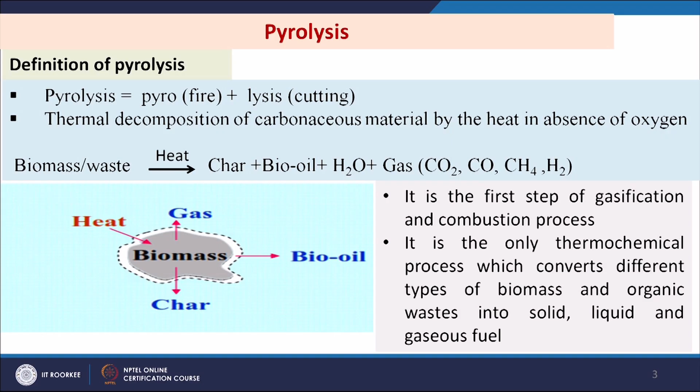Pyrolysis, the word itself gives some idea about it. Pyro means fire, lysis means cutting. So this is a thermal decomposition process, which decomposes carbonaceous material by the application of heat in absence of oxygen. So if we have some biomass and waste

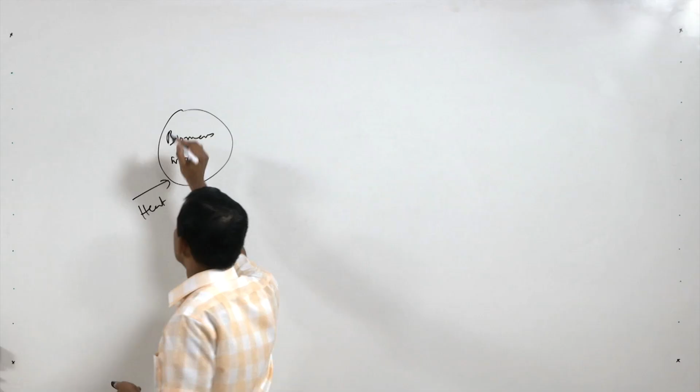or any carbonaceous feedstock, we simply apply heat. In combustion and gasification we had to put some other medium, that is oxygen for combustion, and O2 and H2O in case of gasification, but in pyrolysis we do not need these two, only heat, and that heat will give us char, gas, and bio-oil.

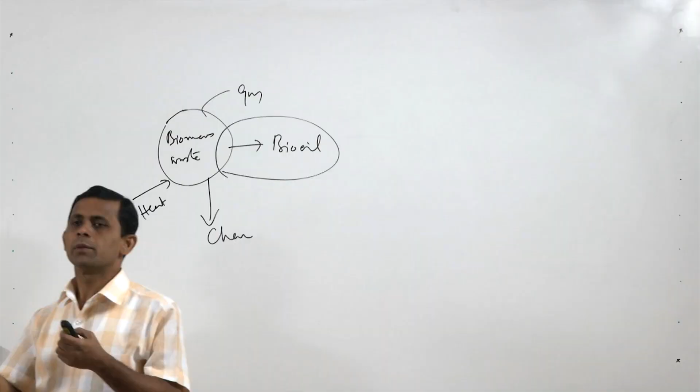This is very simple to explain this phenomena graphically, but in fact bio-oil production and char and gas production is not a very simple process. A number of simultaneous reactions are going on when we apply heat onto the biomass and waste.

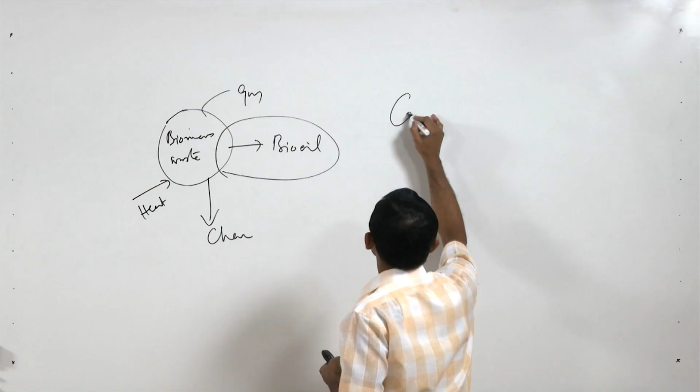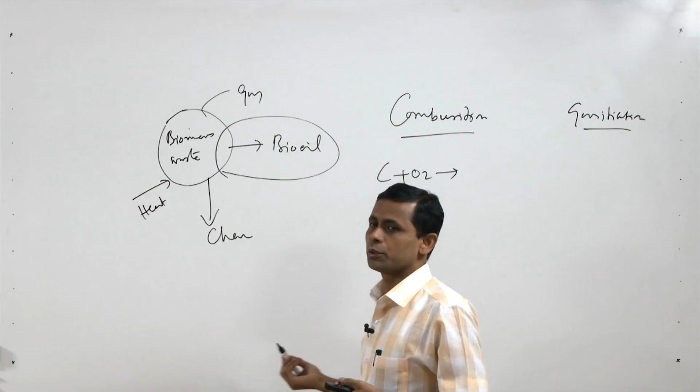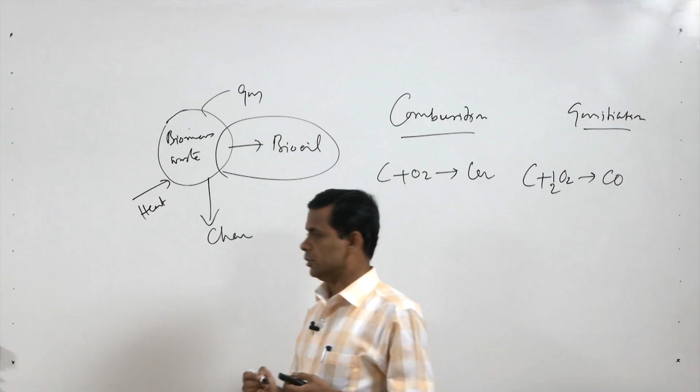If we think about a combustion process or a gasification process, it is very easy to explain these things: elemental carbon of the material reacts with oxygen and converts to CO2. Here we can say C reacts with oxygen and produces CO, but here there is no media for conversion, only heat.

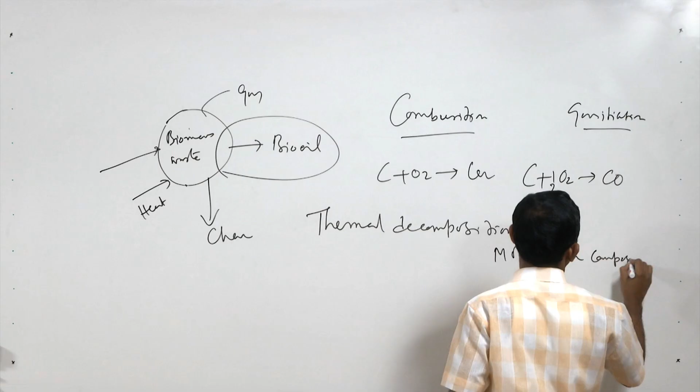So thermal decomposition is going on. The kinetics of thermal decomposition, what is the rate, how this is happening, what will be the molecular composition - that is not easy to predict.

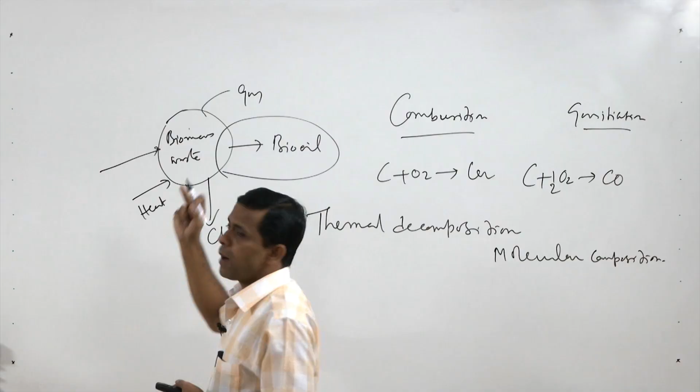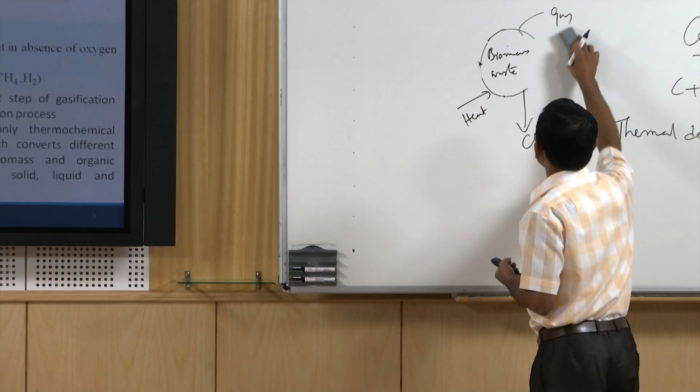This pyrolysis is also part of incineration and gasification. So this is the first step of incineration and gasification. When some waste comes in contact with heat, at first the moisture vaporizes and then devolatilization takes place.

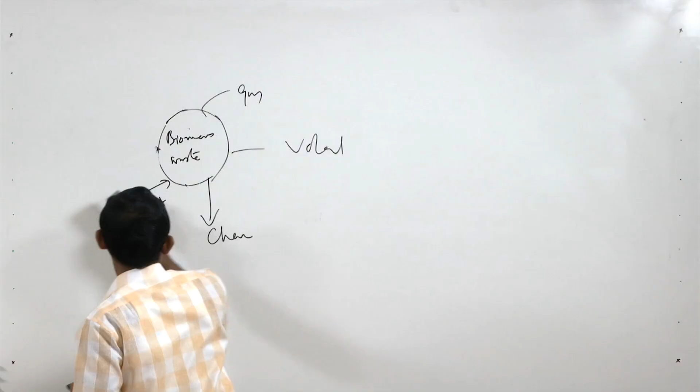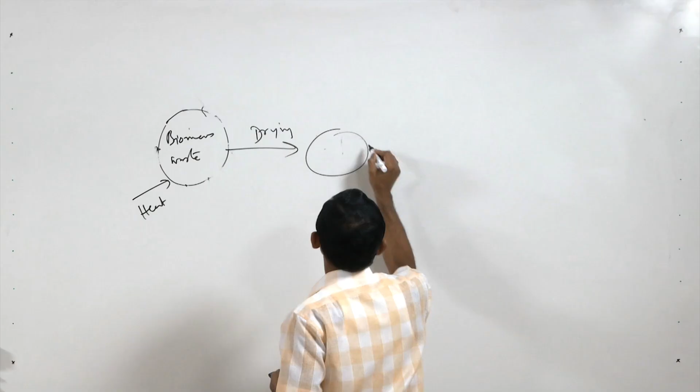In case of combustion, the volatile - first drying, then it comes to devolatilization, that will give us volatiles and char. These volatiles will contain many compounds: aldehyde, alcohol, acid, many things.

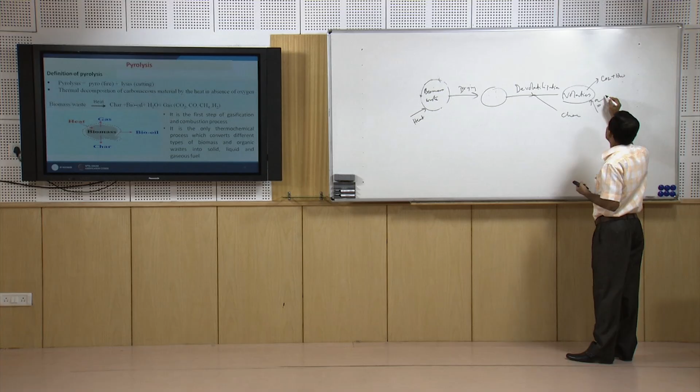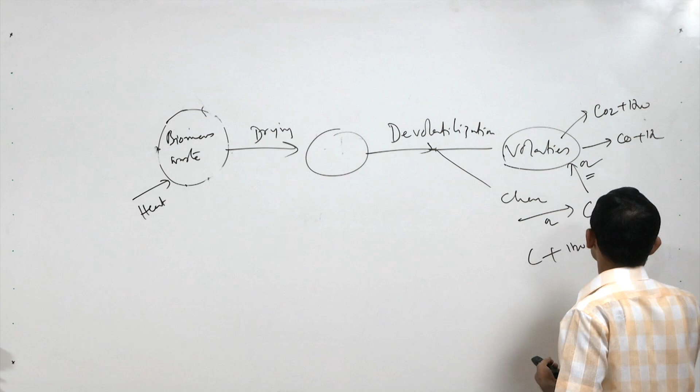So when we put oxygen, we get CO2 plus H2O. When we give controlled amount of oxygen, that will give CO, H2, and then char is also oxidized to CO2 in case of oxygen; again this char is converted to CO plus H2 in gasification. These are for gasification, this is for combustion, but in case of pyrolysis nothing happens here.

So these volatiles will go off from the system, or if we keep it for a longer retention time, those volatiles will be further broken down into smaller compounds, and those smaller compounds will also combine together through different chemical reactions and produce a number of products or components.

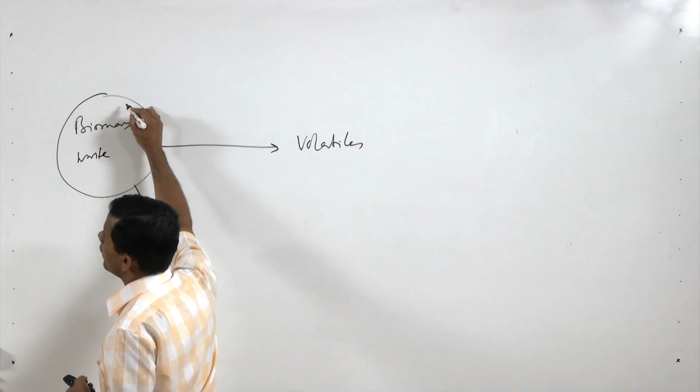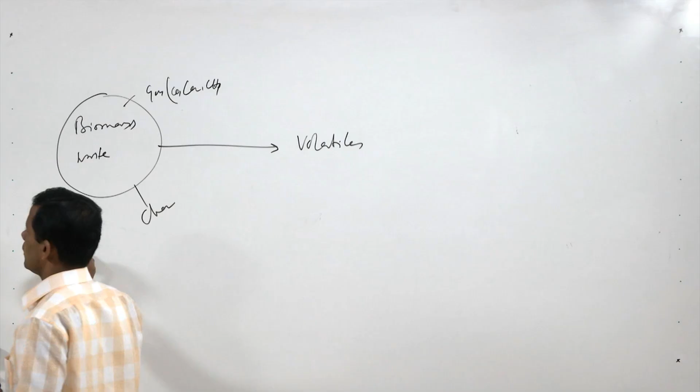Here the pyrolysis mechanism is shown in the slide, where the biomass and waste is taken and heated, then it gives volatiles, char and also gas. This gas may be CO, CO2 or CH4. The temperature here is 450 to 500 degree centigrade, for a very small time, say 1 second, less than 1 second.

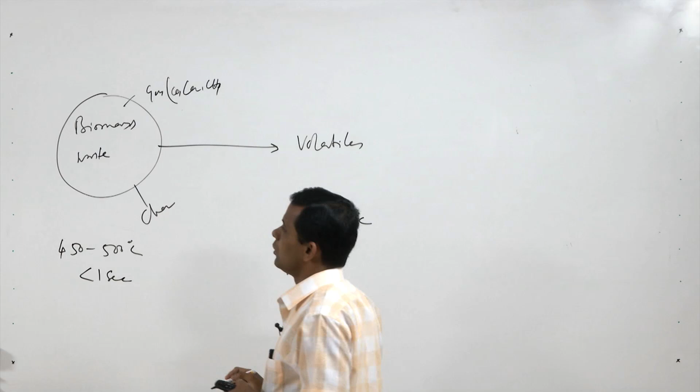If the material is heated, then we will get these things. Now we will increase the time, say greater than 1 second, at 400 to 500 degree centigrade. So these volatiles will further be broken down, giving some gas molecules like CO, CO2, CH4, or some other molecules with lower molecular weight.

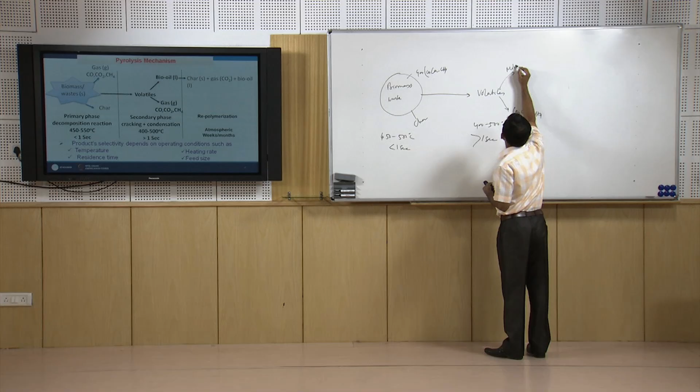So this volatile in vapor phase material is further condensed.

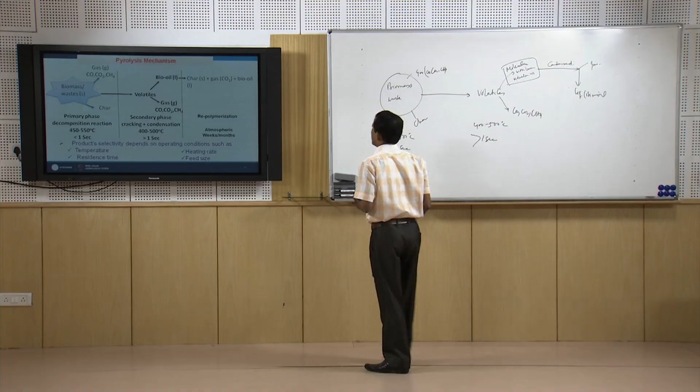After condensation, we get liquid, that is called bio oil, and the other part we get as gas. So, this is the mechanistic path for the production of gas, liquid and char.

Now, a number of reactions are going on, and depending upon the residence time, temperature, and pressure in the reactor, the distribution of these products will vary.

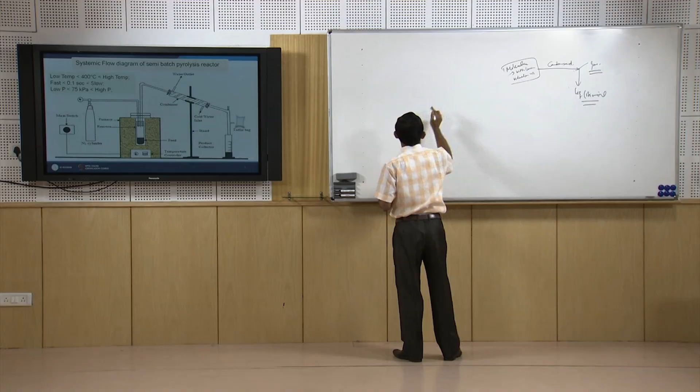So, this is one batch scale reactor for the pyrolysis of biomass and waste. We will get some important information from this figure. We have a pyrolysis chamber, a very small one, inside a furnace.

This furnace will apply heat. We put some material here, and we heat it using a coil. The material is connected, and when we raise the temperature, vapor will be released while char remains inside. The vapor and gas will go and condense in the condenser, giving us liquid bio oil, and gas from the top.

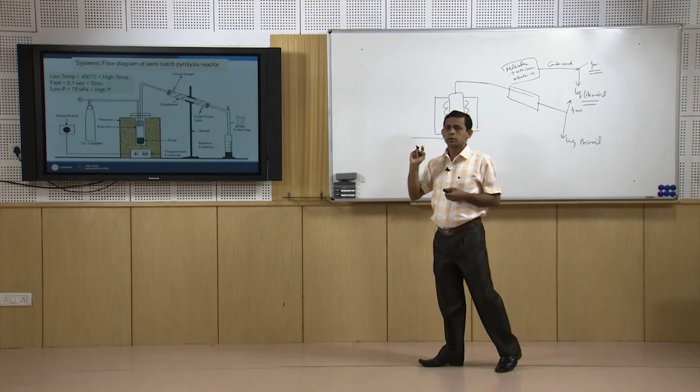One interesting thing is how the gases flow. We need to provide a carrier gas, which is basically inert nitrogen. This carrier gas supply is not necessary in the other two thermal processes, that is incineration, combustion, and gasification.

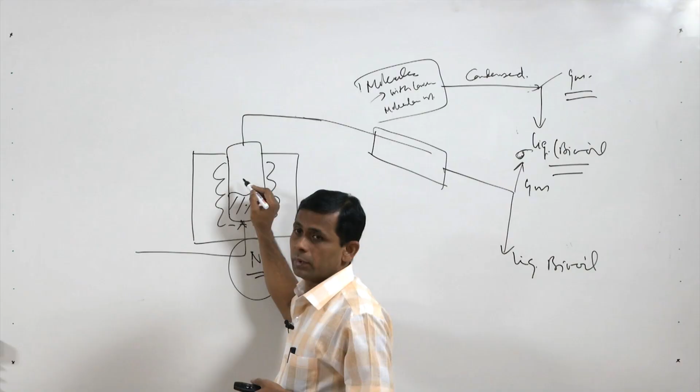So this is a characteristic of the pyrolysis process, where we need to provide nitrogen, or we may put a blower here and create a very small vacuum, so that the generated gas may pass through and liquid can be produced.

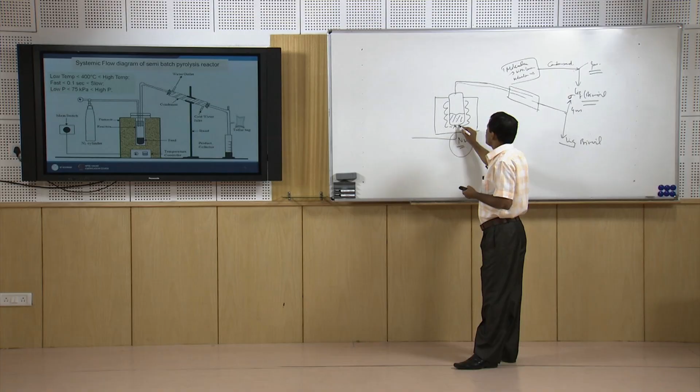Now, the few questions are: what will be the rate of heating, what will be the temperature, what will be the pressure to maintain certain products, because the product distribution depends upon temperature, heating rate, and pressure.

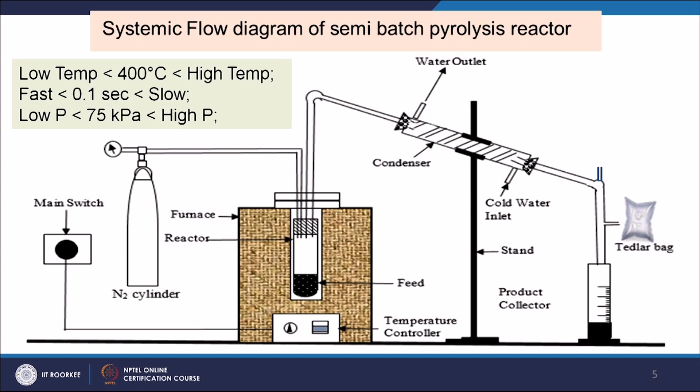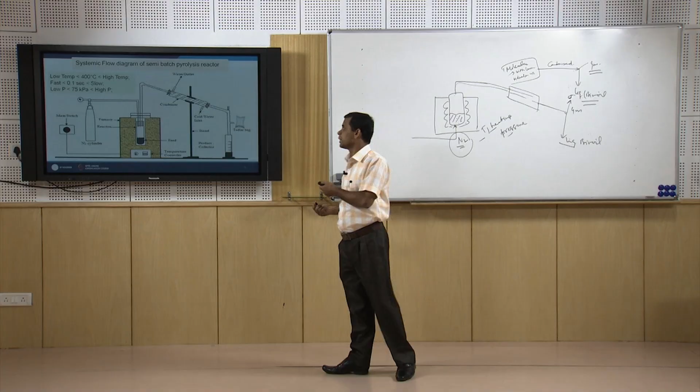Based on variations in temperature, heating rate and pressure, a number of pyrolysis methods have been developed and identified. In some cases we use high pressure, in some cases low pressure, but this doesn't mean a very high or low value. Low pressure means less than 75 kilopascal, and greater than this is high pressure. So pyrolysis reacts under atmospheric pressure, or below atmospheric pressure for vacuum pyrolysis.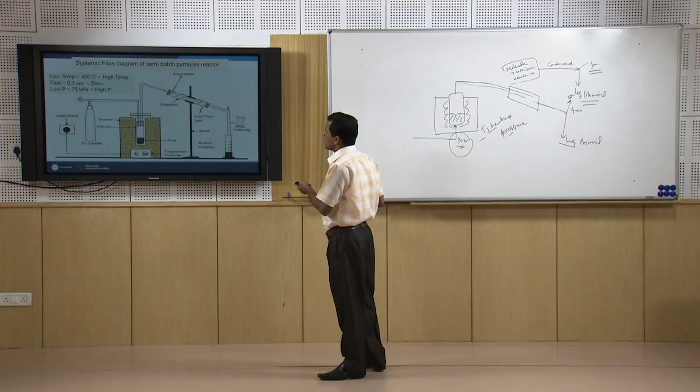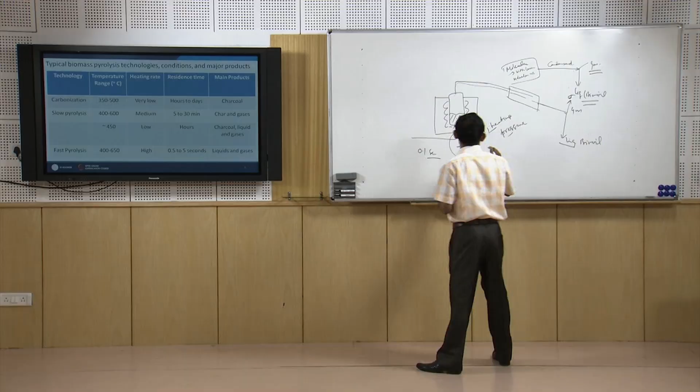Low temperature means less than 400 degree centigrade. Fast means residence time less than 0.1 second, and slow means greater than that. So these are some characteristics, or important parameters maintained in a pyrolysis reactor.

Now, depending on the value of temperature, heating rate and residence time, we can get different types of pyrolysis, like carbonization, the primitive one. In this case, a very slow heating rate is applied for a longer period, and 350 to 500 degree centigrade is maintained. By this method we get charcoal basically.

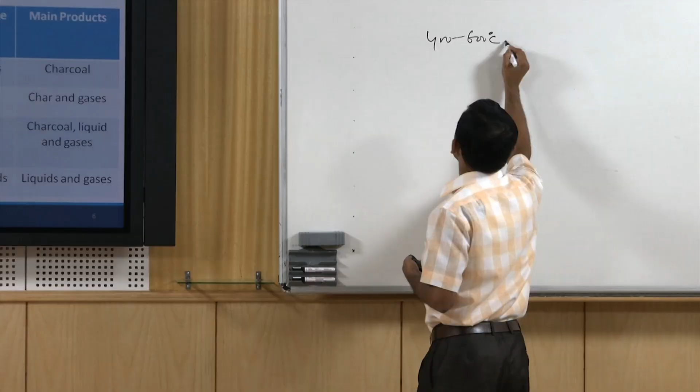Then slow pyrolysis came. For slow pyrolysis, the heating rate may be medium or low, and temperature is 400 to 600 degree centigrade. With a medium heating rate and 5 to 30 minutes of residence time, this gives us char and gases.

But if it is say 450 degree centigrade, with low heating rate and residence time in hours, then it will give us charcoal, liquid and gases.

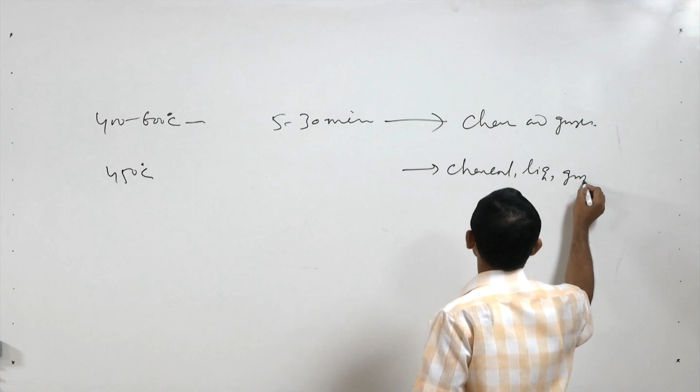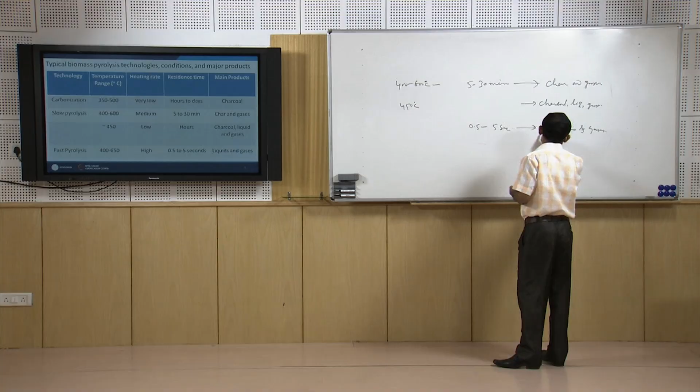Now, fast pyrolysis uses a temperature of 400 to 650 degree centigrade and a high heating rate, with residence time also less, only 0.5 to 5 seconds, and it gives us liquids and gases. The uniqueness of this process compared to incineration and gasification is that it can give three products: gas, liquid fuel and char, with liquid being the more desirable product. So fast pyrolysis produces liquids as a major product and is getting more interest in recent years.

Further development in this pyrolysis process is flash pyrolysis. In this case, temperature is say 400 to 650 degree centigrade, high heating rate, 0.1 to 2 second residence time, and it gives liquid and gases.

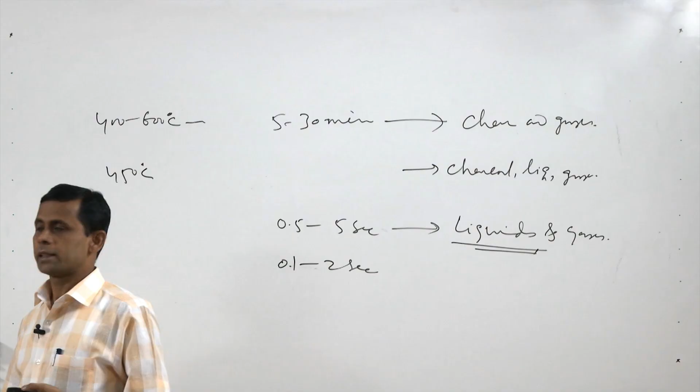Similarly, ultra pyrolysis uses very high temperature, around 1000 degree centigrade, and very high heating rate with very less residence time, less than 0.5 second. It gives us chemicals and gases.

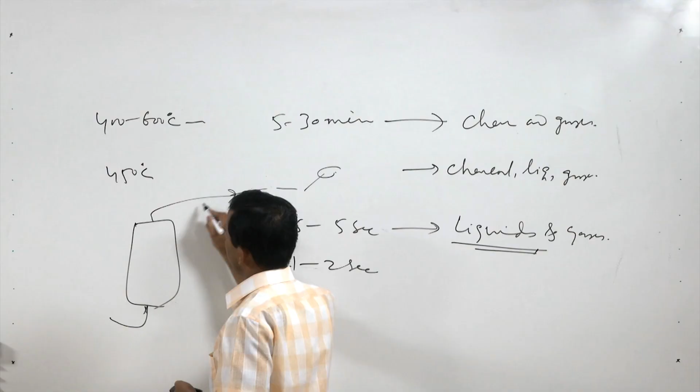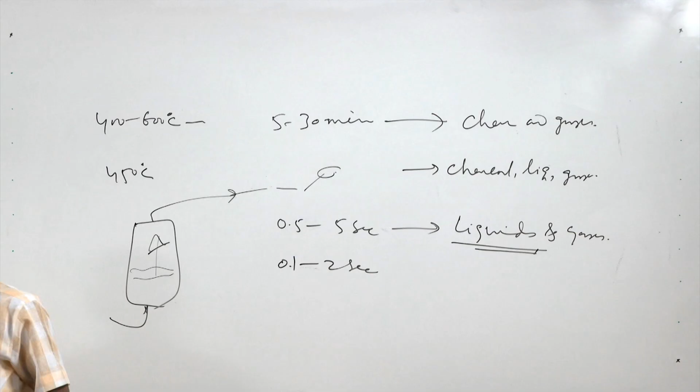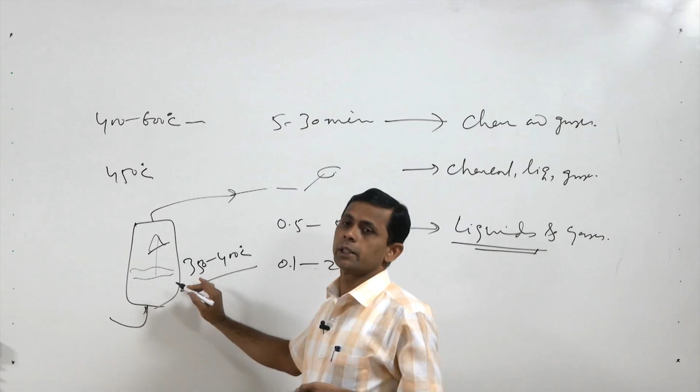Vacuum pyrolysis, as we were discussing, is when there is no nitrogen but instead a blower is added at one end to generate some vacuum. When vacuum is generated, more volatiles come into the vapor phase, giving us more liquids. That's why we get more liquid using vacuum pyrolysis. Here, 350 to 400 degree centigrade is required, which is relatively less than other pyrolysis methods, and we get 2 to 30 seconds of residence time with a medium heating rate required.

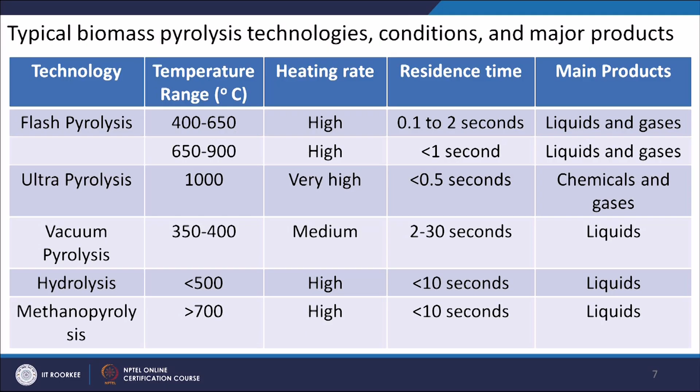Hydrolysis and methanopyrolysis are two other processes recently reported, and their conditions are provided here. For all these pyrolysis processes, the product distribution varies with increase in temperature. If we increase the temperature, the product distribution varies.

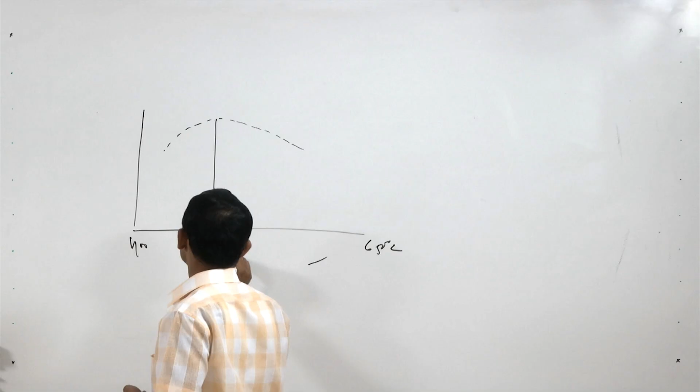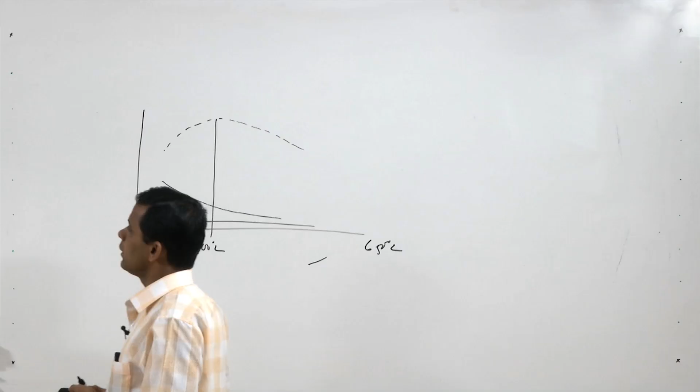If we go from lower to higher temperature, say 400 to 650 degree centigrade, the bio oil initially increases and then decreases after attaining a certain value. So around 450 to 500 degree centigrade, this decreases—this is specific to certain biomass. Biochar decreases with increase in temperature, moisture content shows no much change, and gas content increases with increase in temperature.

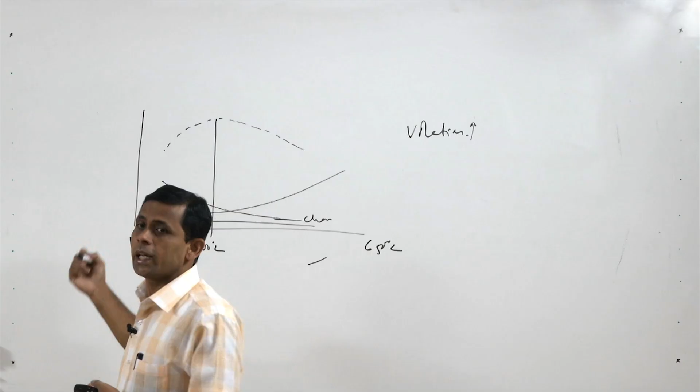We can explain this phenomenon on the basis of the mechanism of pyrolysis. We have seen that there is primary degradation, then further secondary cracking of the volatiles. So more temperature gives more gases, liquid decreases, and char decreases with increase in temperature because secondary reactions are going on the volatiles, producing more smaller molecules of gases.

Now we will see the process flow sheet of the pyrolyzer unit. In one pyrolyzer, we put biomass and waste. That biomass and waste must be pre-treated, because the unit will be able to handle only certain biomass, so pre-treatment is required, just like segregation and homogenization etc. That pre-treated biomass is used, and we need a carrying gas—nitrogen, an inert gas, is normally used. This may be a fixed bed type or a fluidized bed type.

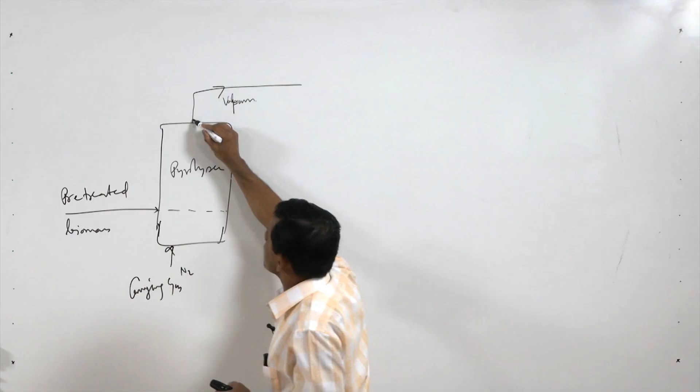If it is fluidized bed type, then we have to add sand. The sand will be fluidized and biomass will also be fluidized with the sand, and heat transfer takes place and pyrolysis occurs. When these vapors go up along with particles, some particles will also go, and then it enters into a separation unit. This separation unit will give us char, and part of the char can be recycled.

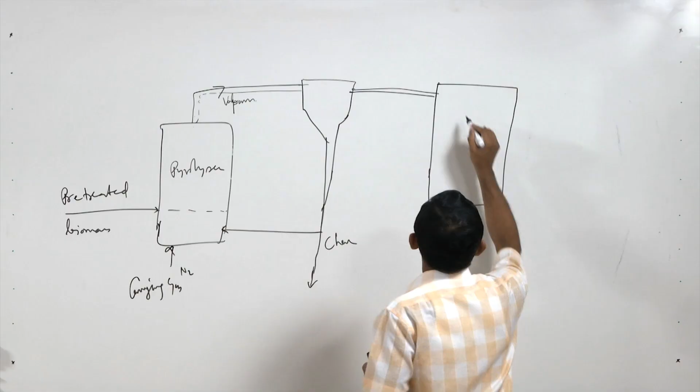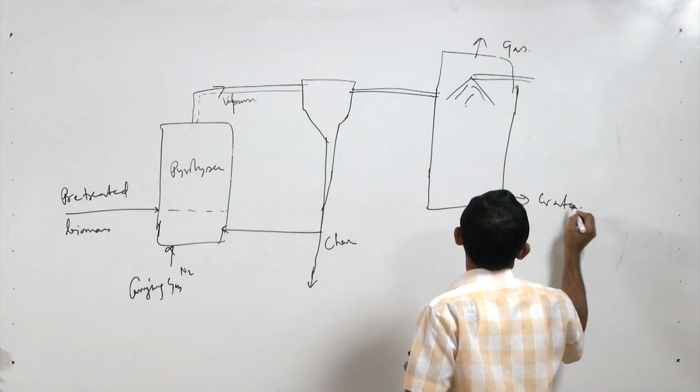Then this gas goes from the collector unit to the cooling unit, where it is cooled either by direct quenching or indirect cooling. Here an example is given as direct quenching, where we spray to cool the gas, which is then collected. From the bottom we get water having some impurities, requiring treatment, and we also get bio oil from the bottom.

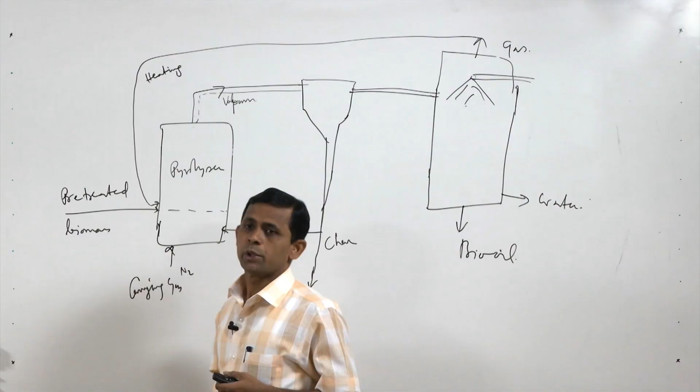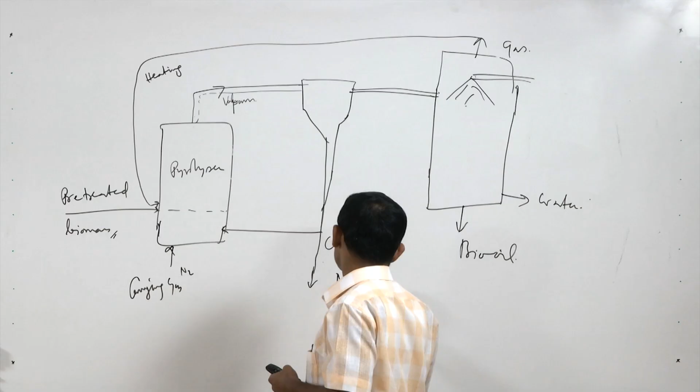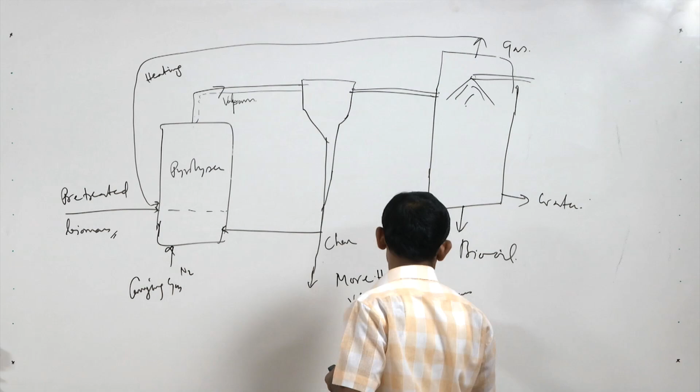The gas which we are getting can be sent for heating purposes. Now, the char we are getting and the biomass and waste we started with will have different heating values. The char will have more heating value than the biomass, waste, or any other feedstock. So this is the flow sheet of the pyrolysis process.

To understand the kinetics of the complex pyrolysis process, people use the help of TG, DTG and DTA data. On thermal gravimetric analysis, the data are generated like this. In this TGA graph, it is evident that up to 200 degrees only around 8% mass loss occurs, but when temperature increases to 334, 38% mass remains, meaning 62% mass is lost. After 500 degree centigrade, only 4.715% mass remains, and above 500, no significant loss of mass is achieved.

So by DTA and TG data, it is clear that for this particular biomass, sugarcane bagasse, we do not need to heat above 500 degree centigrade. Similarly, from this graph we see the rate of change of mass with respect to time: maximum 0.65 mg per minute at 311 degree centigrade, and 0.17 mg per minute at 446 degree centigrade. So the range 276 to 446 degree centigrade is more critical or suitable for the pyrolysis of this biomass.

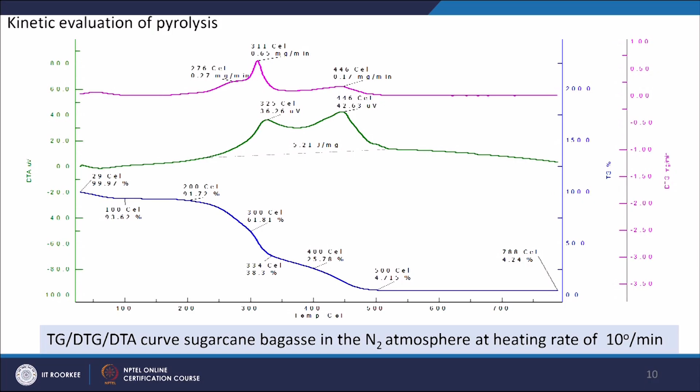These data are also used to determine the kinetics of the reaction and the order of the reaction. I am not going to explain in detail all those procedures, but extensive research is going on to determine the kinetic parameters for different types of biomass and wastes.

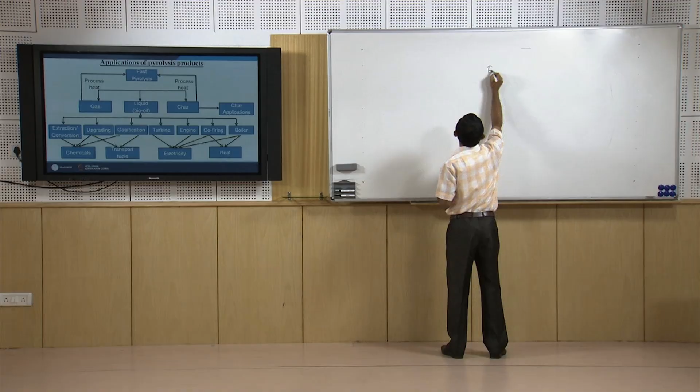Now we will see the application of pyrolysis products. Pyrolysis basically gives us three products: one is gas, bio oil, and char.

This gas will be used for the heating, because this requires heat, and that heat can be produced from the gas. Some char can also be used and burned outside this pyrolysis reactor for heating.

There are some other applications of char, and bio-oil can be used through different routes. It can be used for separation of the compounds present in it.

It has a large number of organic compounds including acids, aldehydes, phenols, ketones, etc. So those valuable chemicals can be extracted, giving us valuable chemicals.

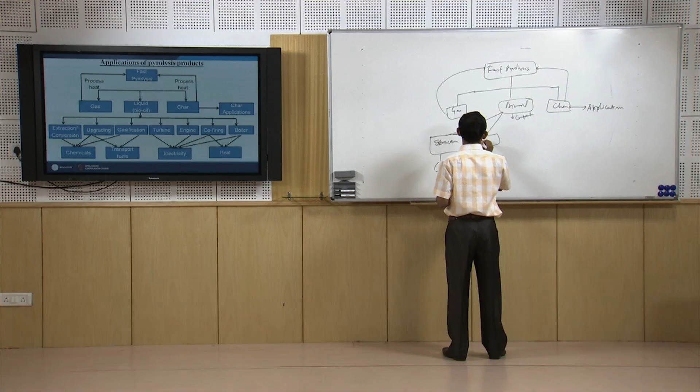This bio-oil can be upgraded, since its quality is not very good. Directly, bio-oil may not be used in engines, so we need to upgrade it. By upgradation, we can get fuels and chemicals.

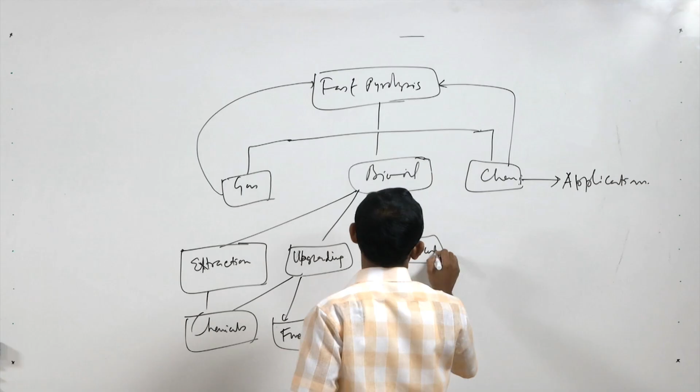We can also use this bio-oil for gasification. We can use this for turbines, for engines, and for boilers and co-firing.

Boiler and co-firing will give us heat, while engine and turbine will give us electricity. Gasification, turbine and engine will give us electricity, and gasification will also give us fuel. So from bio-oil we can get different chemicals, different fuels, and it can be used for electricity and heat production.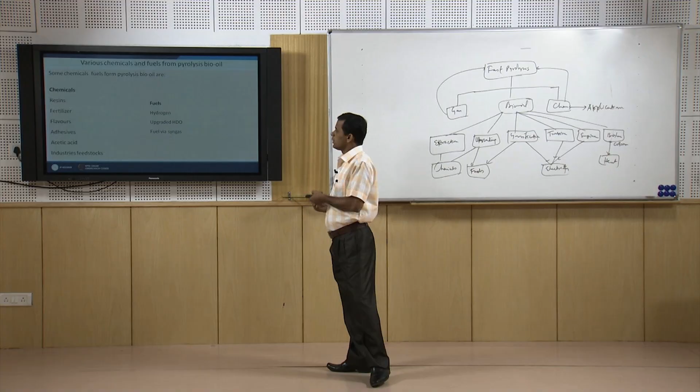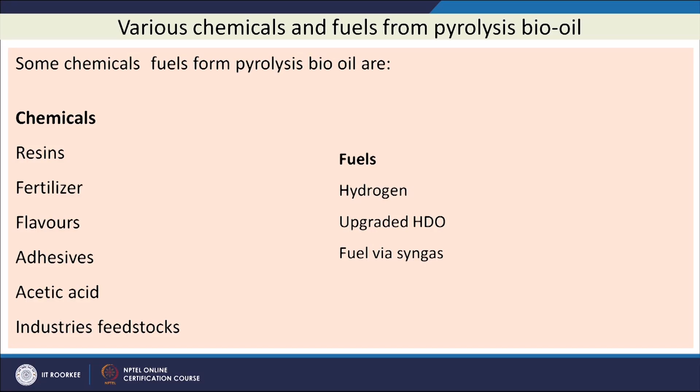Here we see some important chemicals produced from bio-oil: resins, fertilizer, flavors, adhesives, acetic acid, and industrial feedstocks. Some fuels we get are hydrogen through gasification, and upgraded hydro-deoxygenated fuels. The oxygen present in bio-oil is in higher amount, which is not desirable and reduces the quality of the fuel.

That is why deoxygenation, called upgradation, is required so that the fuel can be used. Once we use gasification, we can also get FT synthesis and other fuels.

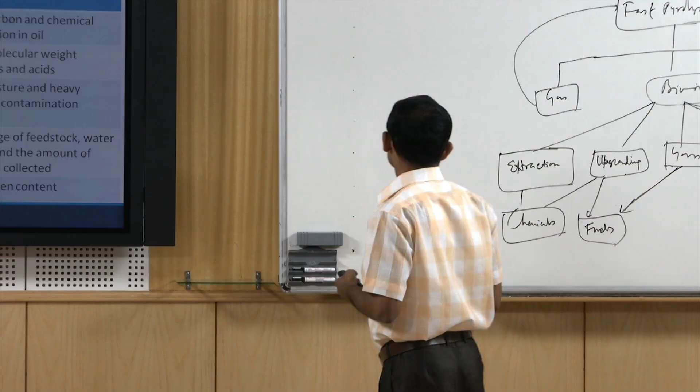There are some properties of pyrolysis bio-oil. We will discuss some important properties and what is responsible for them. For example, this oil has an appearance of dark red-brown to dark green, which is because of microcarbon and chemical composition in the oil.

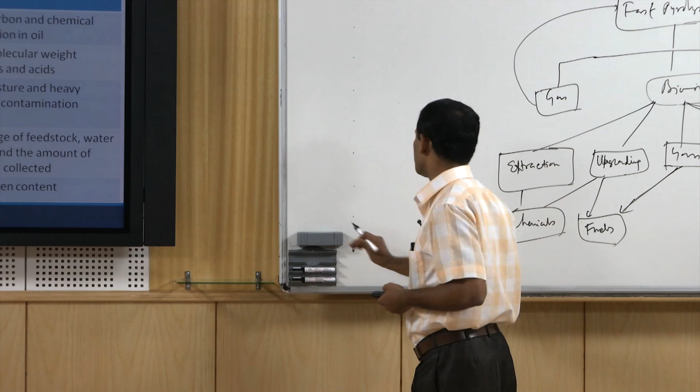Another property is its odor - a distinctive, acid smoky smell, which is due to the presence of different types of aldehydes and acids. The density of this oil is more than fossil oil.

This is because of high moisture and heavy molecular contamination, and viscosity and heating value are also not similar to transportation fuels. Another important difficulty is aging - with time, its viscosity increases, volatility decreases, and phase separation takes place.

This is because of the presence of different molecules generated through the degradation of cellulose, hemicellulose, and lignin. Different types of acids, aldehydes, alcohol, sugars, phenols, etc. are responsible for this phase separation and other degradation in quality.

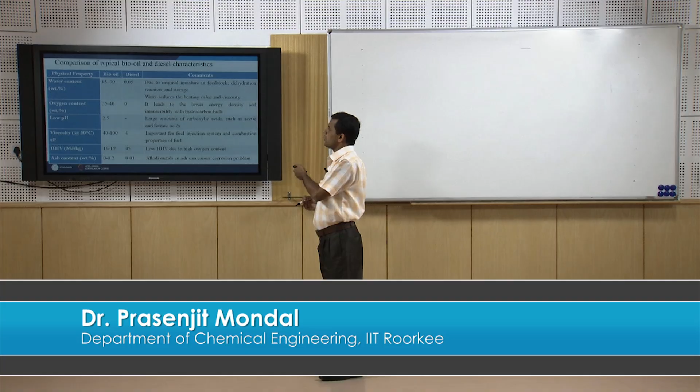Here we see a comparison of properties between diesel and bio-oil. The moisture content and oxygen content are very high with respect to diesel, which are not desirable and reduce fuel quality. The pH is low, around 2.5, due to the presence of carboxylic acids like acetic and formic acid, which are also not desirable. The heating value is also less, due to the presence of high oxygen content.

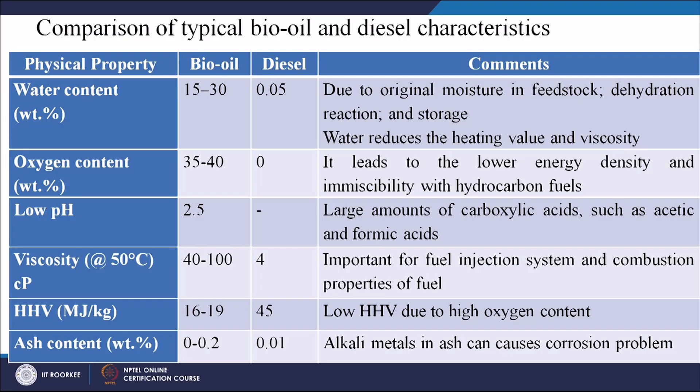There are some advantages of this process - we can use waste and get a liquid product - but it has some disadvantages also. The oxygen contained in the liquid fuel is not desirable, and it is not stable for a longer time. There are a number of disadvantages as mentioned.

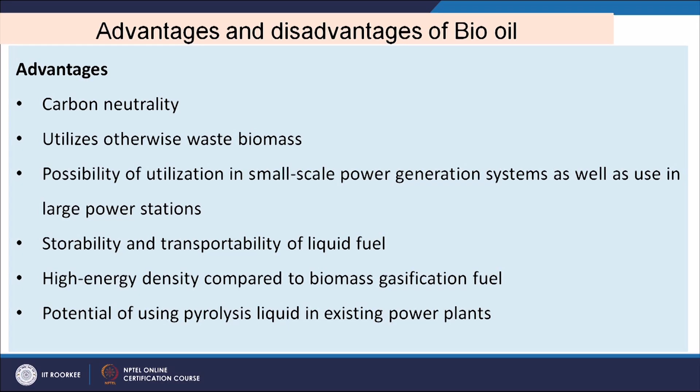To remove these disadvantages, upgradation of the bio-oil is required, using physical methods and chemical methods. The physical methods include filtration for char removal, emulsification with hydrocarbons, and solvent addition. For chemical methods, reaction with alcohols and catalytic deoxygenation are used.

Catalytic deoxygenation can be done either by hydrotreating or by application of catalytic vapor cracking. Hydrotreating is performed at a temperature of around 350 degrees centigrade with some catalyst, such as cobalt molybdenum and nickel molybdenum. Using these catalysts, hydrotreating is possible.

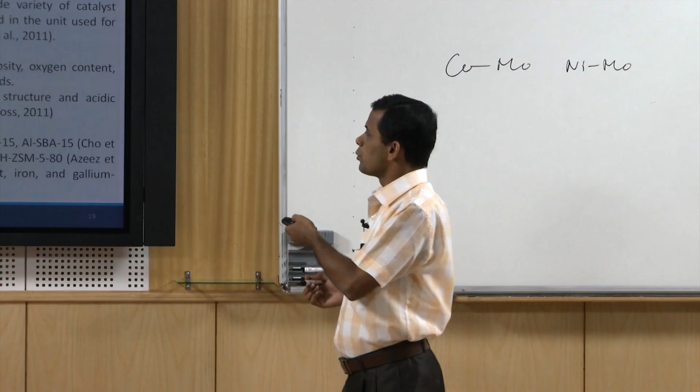Another approach is going on - either we produce bio-oil and upgrade it, or in place of this, people are trying to use catalysts during the production of bio-oil, that means in the pyrolysis process. Different catalysts have been introduced in the pyrolyzers, improving quality in terms of reduced acidity, viscosity, and oxygen content.

Some catalysts used for this purpose are mentioned here. So, up to this in this module, we will discuss in the next module about different pyrolysis reactors. Thank you very much for your patience.